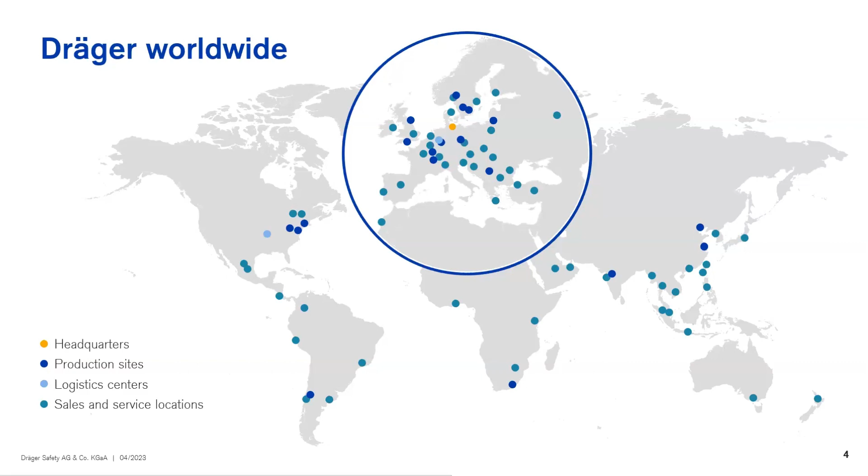Our agenda: we will start with confined spaces, and you will see hazards and risks. Then we have a little slide about accidents and incidents, this one from the NIOSH side. I want to show here that you have also to look for different injuries for rescue and so on. And then we have module 3, our gas measuring, clearance measuring and monitoring. It's also an important point.

So far, then we can start with our first topic, confined spaces, hazards, and risk. We will start with a little bit of basics about confined spaces so that we are all committed on what is a confined space. This is our slide for this.

So a little question, a little bit preparing about confined spaces. What is now a confined space? Have you been sitting in a confined space? Wait a moment, you will see after these pictures a little confined space. But we have to talk about which topics we have of confined space.

You see here, when I lay in some containers or something like this, I enter confined spaces. Also in the middle is a press, as an example. There can also be some gases or hazards inside. On the other picture, he enters with his head in the confined space. On the further side he works, it's not directly in a confined space, but you can see on the edge of this side that his head will enter a confined space. It's the same like on this job, when he lifts higher up with his head, he will also enter a confined space.

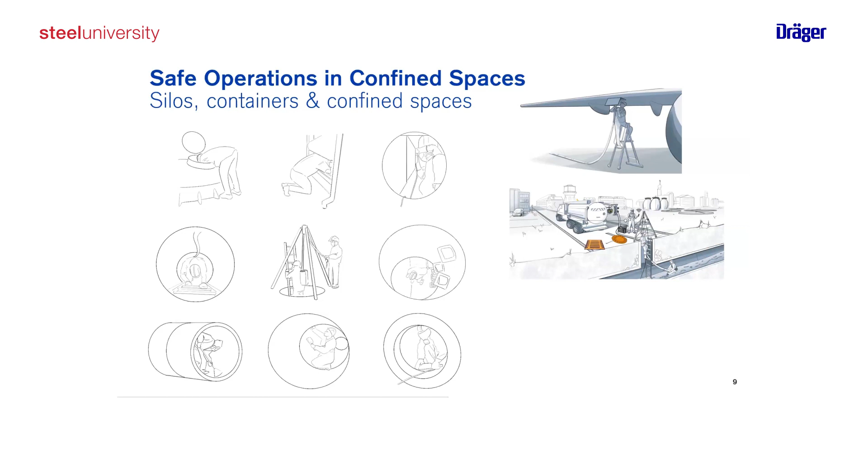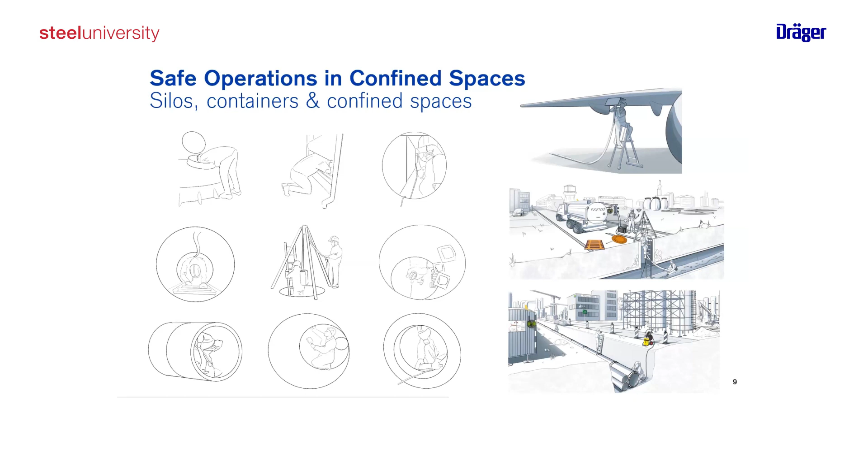Next topic can be this: you know this as an example from waste water, or also from other drains and so on. Here we have a picture, and you see a typical waste water part, but you will have this on your company plans too. So we have here also some waste water, a familiar one. And from the manufacturing side, as an example, when you will be in a tube or something like this, it's also part of confined spaces. As an example, you dig a hole or something like this, and this can also be a confined space when he starts welding or other things. So a little overview, there are some more, but I think these were some typical ones.

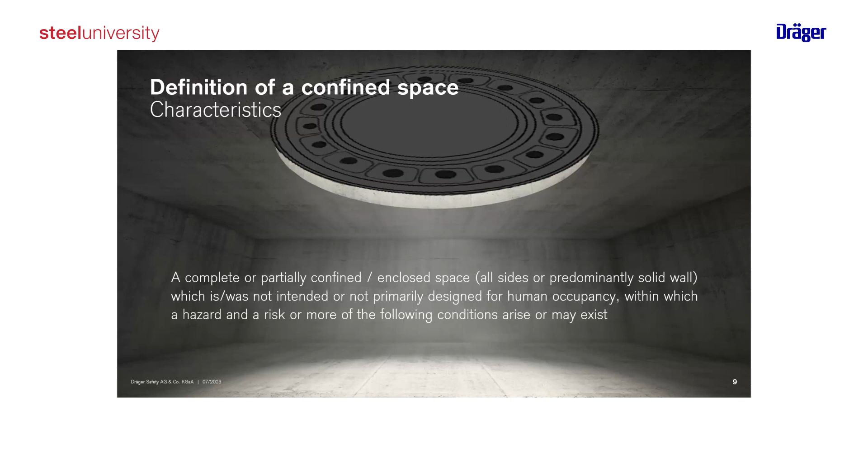And now you will sit in a confined space. So the definition of a confined space: it's a complete or partially confined, enclosed space. It's fully mounted and so on. But the important thing here, when you have the discussion about confined space, the important point is it's not primarily designed for human occupancy. This is one of the important things when you think about whether this is now a confined space or not. So it's not designed for the human being as a normal work environment. This is the main part.

What can be in the confined space? We can have toxic air, for example, or we can have a hole on the top of the confined space where we can enter, and inside of the confined space, as you see on our picture, there can be every type of liquids, hazardous gases, whatever you can imagine, because remember, usually that's a production site and we have some products in it and they could be dangerous also if they are empty or cleaned, but the rest of them will always be there, like you can see on the right side of the screen.

So now we have put some birds on top. We have opened the lid, and what do the birds think at first? This old measurement method from mining, as an example, was with these nice birds, only for information. So this one will say, this is not my part. The other bird says, I will fly away. The other one thinks too long and falls into the confined space. Can we now go further in to get out this little bird?

No, think about it: ERP, or stop, it depends, part of ISO 45001. And think about it, it's a trap. Confined space permitted only by permit as an example, and you have to calculate the risk and do the safety parts. The definition of confined space is the first one: for example, if you have less oxygen, then there's a dangerous atmosphere and you can't breathe. The second one is explosive atmosphere.

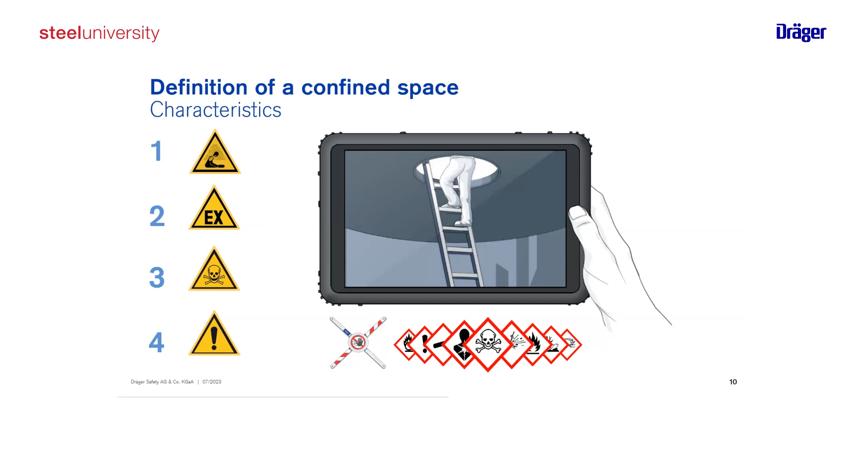But a lot of people forget number four. And number four is attention to other hazards when we work in confined spaces. There are a lot of them. As you can see in our slide, the first one, or one of the most important ones, is injuries caused by falling. Like you heard last year, working at heights and so on, there's always the possibility that you can fall when you want to enter or when you work at different heights. There could be the danger that you are falling.

And you can also have some radiation. It's a bit special, but it can happen that things like this will be present. So you can't taste it, you can't smell it. It's the same like carcinogenic ones. You can't taste it or smell it. Or crushed by...

...a loud noise. That's one of the most important things in my point of view, because think about it. You are surrounded by steel and every noise is so much louder than it would be in a surrounding area where no steel is around you. So that's much, much louder than you can imagine. And for this we have also designed some nice safety tech, which you can find from Draeger, and also electricity shock. Think about a transformer or something like this.

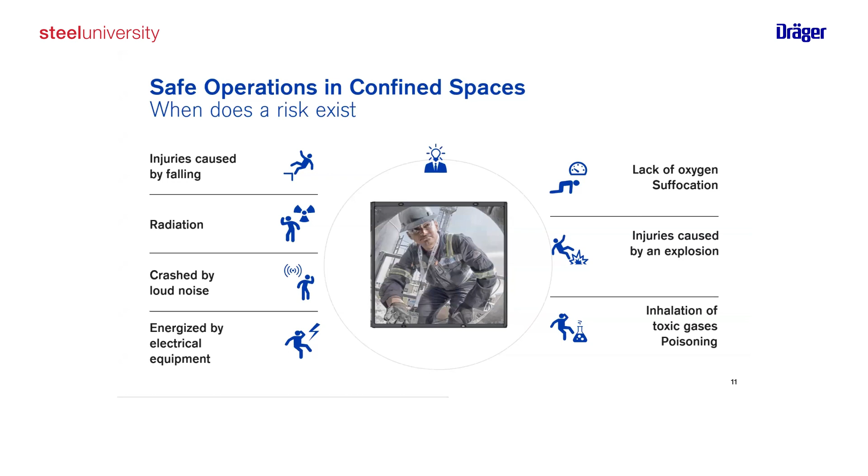And our typical one, what René said, is lack of oxygen. That's quite dangerous because a lot of substances are heavier than air and they push the oxygen away, and then you just have a toxic material there, which you can't breathe. Here we have the reminder also, ox, ex, tox. And the toxic gases, be careful, but we have more information about this later.

So, safe operation in confined spaces - we have talked about risk assessment from last time, and we have also some more topics. This is what I mean with the attention triangle, and we will go through all of this. This is, as an example, mechanical hazards.

The second one, for example, is electrical hazards, which come from different machines you use to work in the confined space. And the next one is our hazmat substances, what we have to consider. Sometimes when we work inside, we bring hazmats inside the confined space, and this also changes the atmosphere.

Another topic is biological hazards. That's also very dangerous and can come, for example, from the production process before we cleaned the vessel or confined space. Think about a bird - it can happen that a bird falls in before you have to enter a confined space. Sometimes you have dead animals or something like this inside, or in other countries this can be snakes, and this can be really dangerous.

Another point is fire and explosion. A lot of the work involves welding or other fire-related activities. So there's also the danger that you can have an explosive atmosphere. And if you bring fire into that, or electrical dangers, there could be an explosion or a bigger fire. So think about that, please.

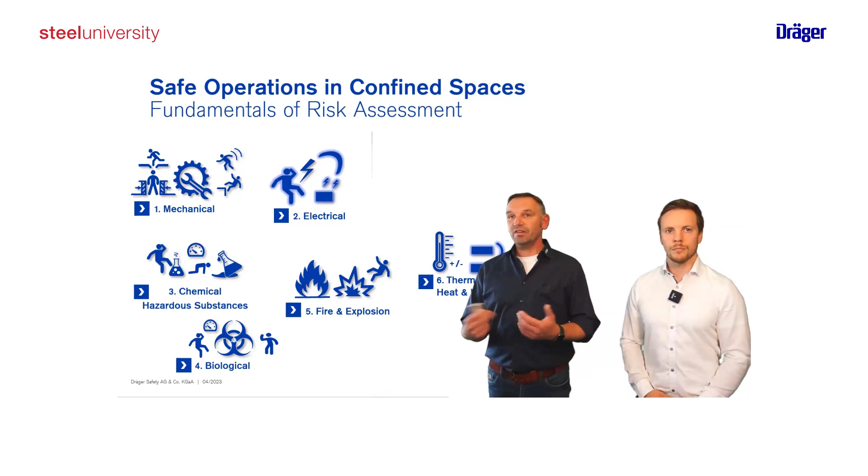And then we have temperature. A lot of people forget to look at the temperature side of a confined space. For example, when Thomas and René enter a confined space, we'll also heat up the confined space with our body temperature. So for example, we start at 20 degrees, and during our work over time, we can also raise the temperature of the confined space. Or you cannot enter because the temperature is too high, and you will be at risk from temperatures, so you have to reduce the working time.

Think about it, we have also for this a nice safety tech from Draeger. And heat and workload, it's also very important. Now we have the summertime, it's becoming hot everywhere, and it's the same thing in confined spaces.

Also the physical effects, noise, vibration - there are a lot of them, and all of them could be dangerous for you. As René said, an important example is when a hammer or a tool is falling - you will see this later in incidents and accidents, falling equipment as example. This is much louder when it's falling in a metal surrounded confined space.

Moving on from the slides, we need a little more space for the next one: number 8, the working environment conditions. Like I said, heat in summer or rain could also be very dangerous, because if you have to go on a ladder down into a vessel, it could be very slippery and you're falling.

This was also a nice experience for me, as I gave a train-the-trainer course in Beijing. We had to stop the training during the daytime and shift it to night, because the training gallery was also too hot - a nice experience also for my trainers in this case.

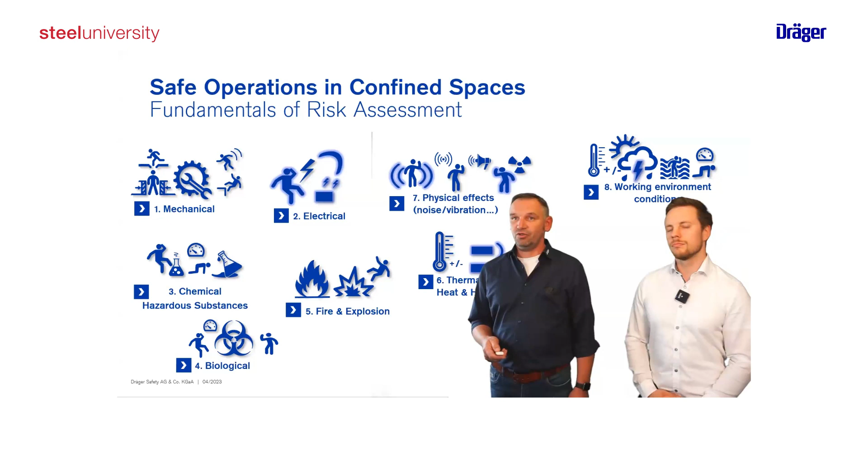Then we have number 9, ergonomics and mental workload. This is also part of the trainings. Mental workload means, in this case, can I go into a confined space? If I'm claustrophobic, this is dangerous also for the other colleagues. And ergonomics in confined space is a really interesting part.

You have to work in uncomfortable situations, not the standard you have at a working bench, so you have to be on your knees for longer times, and this can be horrible in this case.

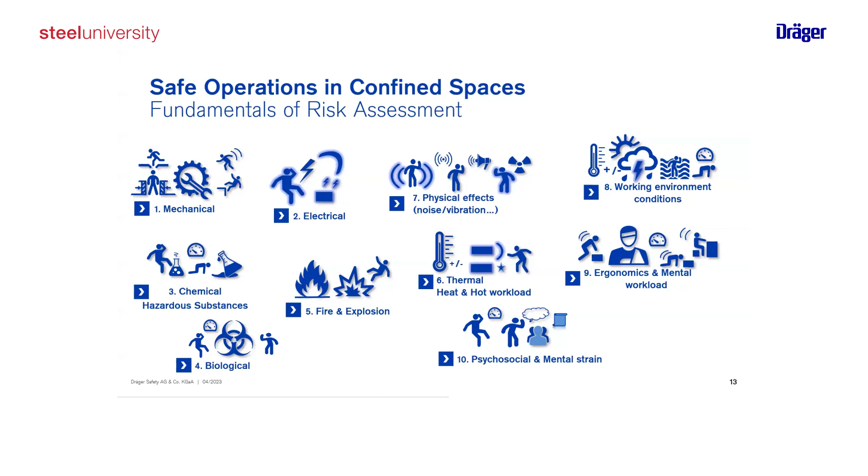Another point is the psychosocial and mental strain. All these hazards you can see on these slides come at you at the same time maybe, and that's a lot of stress you are focused on, and that could be a very big danger - because maybe you forgot to wear your PPE, your protective clothes, or your harness, and then maybe you fall or get hurt.

So we stop here from the 10 hazards - there is more, also work processes and so on. The reason we show this for confined space is the interactive nature René mentioned - this makes confined space so typical. This is why there's a special, in-depth risk assessment specifically for confined space, and every confined space has its own risk assessment.

It's really critical when you just copy and paste a risk assessment. You see we've also included some animals and so on - it depends on which country. Snakes can also be really, really dangerous.

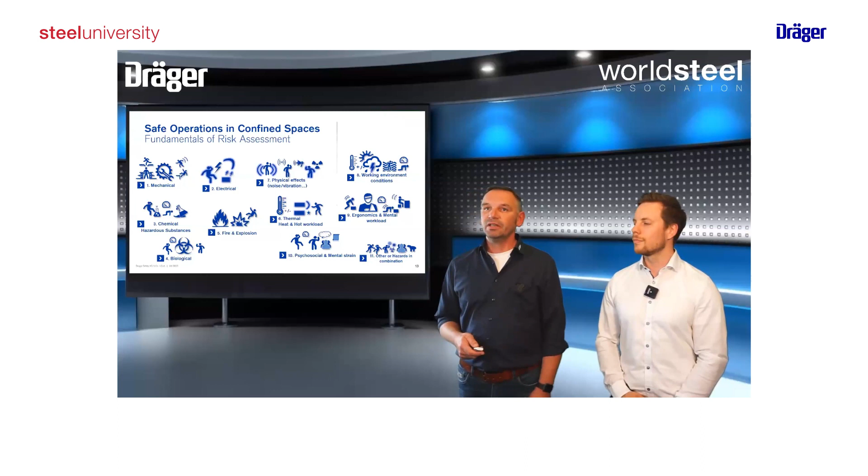As a reminder, we have our ERIC PD here. This is the standard one, but as I said, we make a deeper and more specific risk assessment for confined space. So we have to look every time to eliminate - when it cannot happen, we have our confined space.

Then we have replacement and reduction of the hazards, the substitution. And a really important thing for confined space is the isolation.

You have to take care of the people who are working inside, and take out the hazards of the confined space, so that the people are isolated and can work safely.

Another very important point is controls, the administrative measures, for example. Make sure there is no hazardous atmosphere in your confined space - do your clearance measurement first, and also continuous measurement after that. This is why we talk about it a bit more now.

For confined spaces, isolation and controls are really important. Think about ventilation every time - this is what some people forget. You'll see this later also in the incidents and accidents.

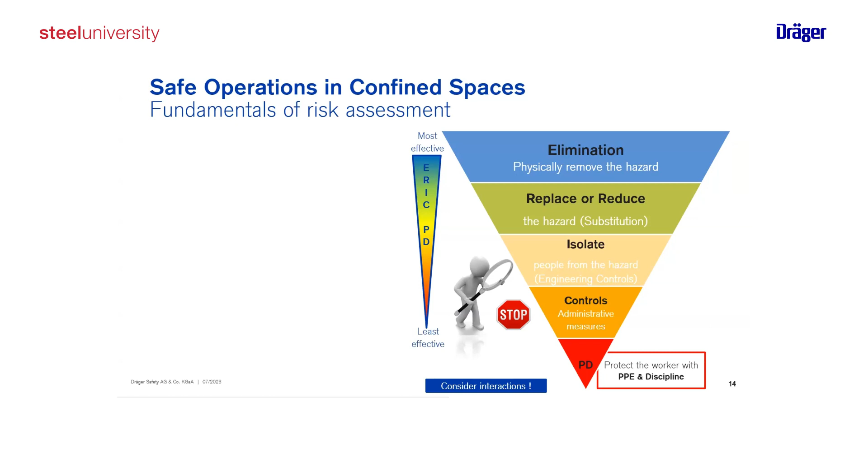And PPE - this is also an important part. PPE is individual for every confined space. Some guys think about fall arrest systems and say, hey, I've used this for this confined space - copy paste can be a big hazard in another confined space.

Think about the hazardous substances, the chemicals - you can have benzene in one confined space or toluene in another. They are different and you have to take care of different protective measures. This is important for us as health and safety engineers, to understand the procedure - for example, you can have 1, 2, 3, 4 vessels.

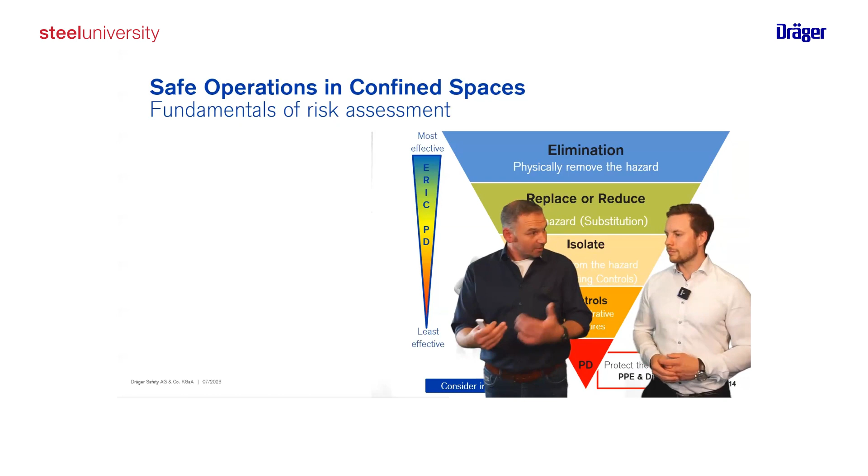There is a video also on YouTube where he's working on the first vessel, and then they have done copy and paste. And on the last vessel it was in an explosive atmosphere, leading to a critical situation.

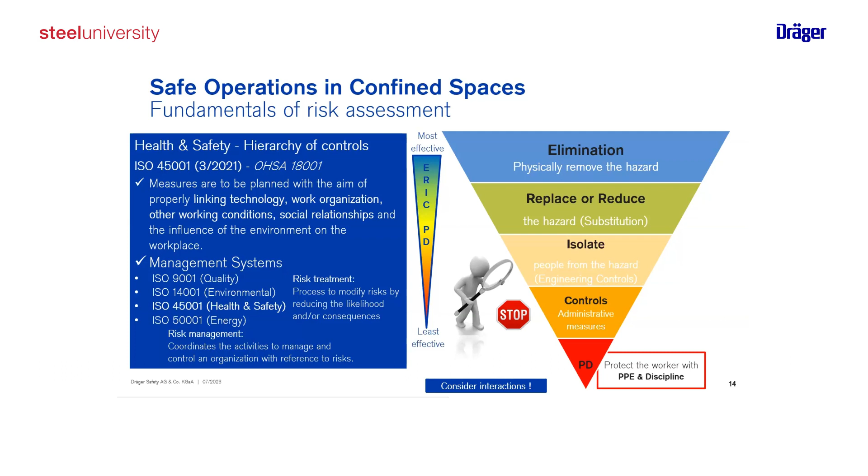I want to focus on one point: on the bottom right side, discipline. That's very, very important for us because you can prepare for every situation most safely, but if you are not disciplined and don't look after yourself and your neighbor and working partner, nothing can help you. So having the right discipline is very important, and this is what we also train by RSS, Rental and Safety Services, where we train extra people for this.

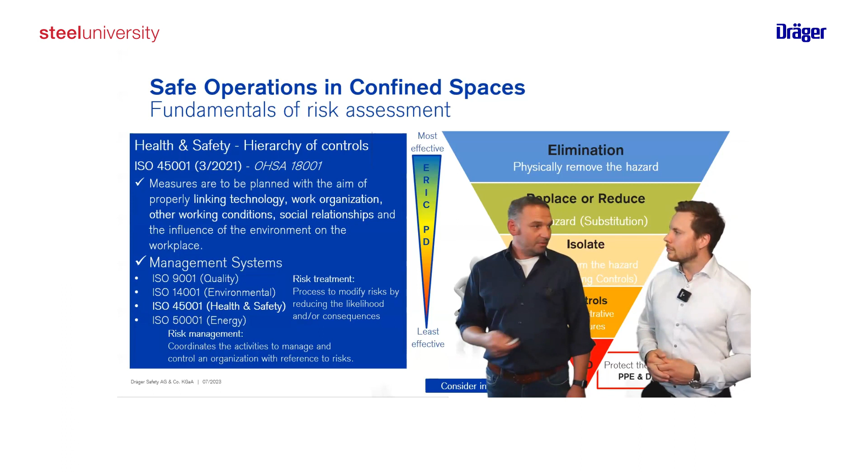This also gives some 60 seconds of safety - we have designed some things about this. So then we have our safe operation: planning, permit, and clearance measurement.

For this we have different jobs, and you have to follow the job. The permit is written for inspection, not maintenance, and some people have to learn to follow what is on the permit. This shows how important the permit is and that it will be used - you will see this later as part of our incidents and accidents. When you write a permit and don't use it, it makes the permit no sense at all.

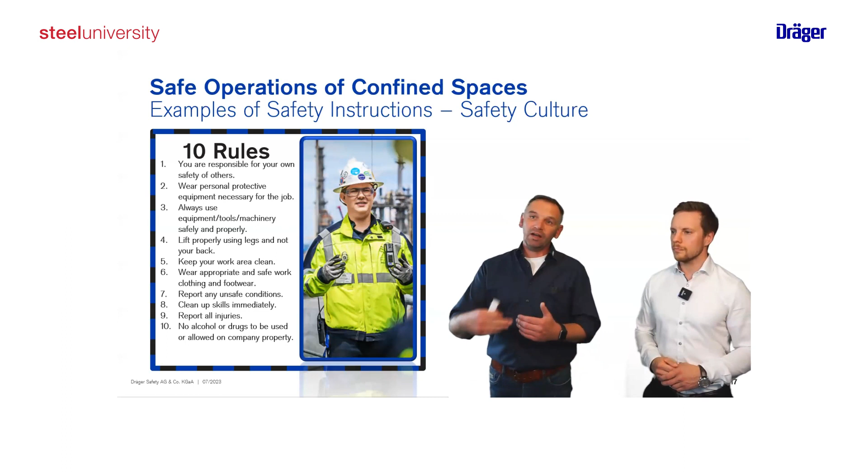This is also part of Vision Zero. With this part you can see which contractor you have, and you can see how the workers work together. In this case, you can see how far along they are with this safety culture. We'll have a little bit more later.

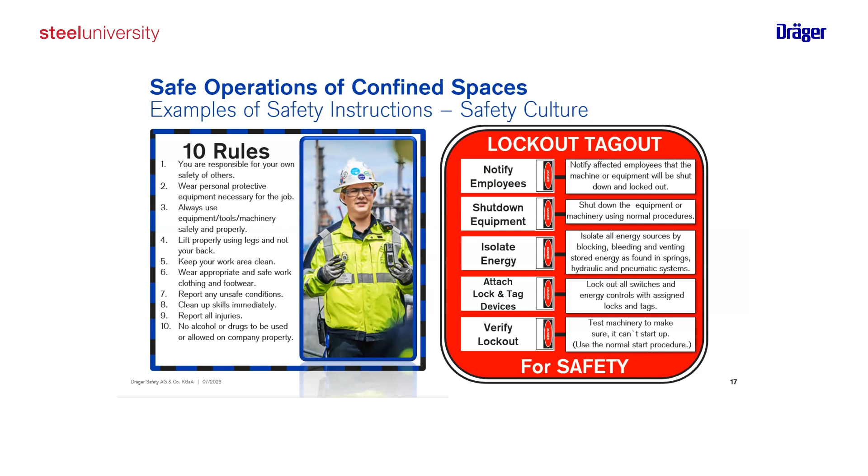We have a little bit on lockout, tag out, so we'll see this again at the end of the presentation. But remember here, it's part of safety - you've spoken about isolation and control. So with this first part, we'll be quite close to the end of this section.

Now we have the harder part: facts. We have to talk about accidents and incidents, statistics, and also what makes sense - I'll show you on the last slide. A miss report makes sense. When we look at incidents in confined spaces, it's quite hard to find exactly where the accident or incident is, and this is the reason I prepared this from NIOSH.

There I find it useful to think differently about what was happening in the confined space. We had to talk about the hazmats - for example, number 3 was hazmats or dangerous parts. Sometimes the mistake is that deaths or fatalities are only counted under hazmats or explosive atmosphere, but people forget to put this under the confined space umbrella.

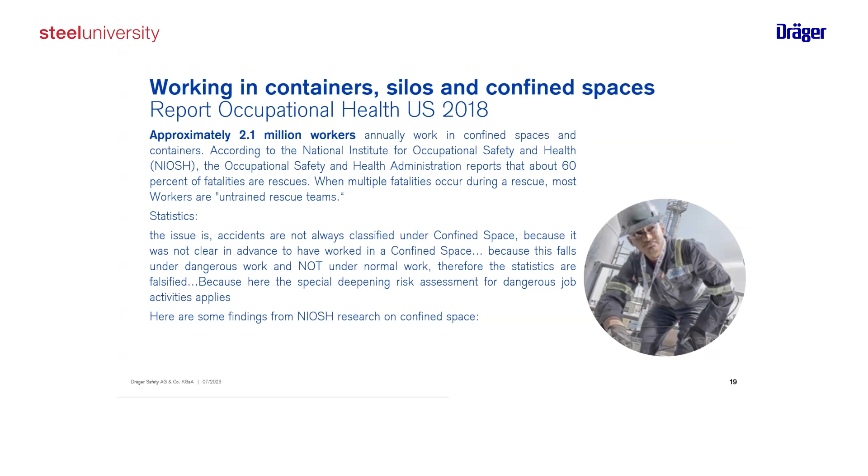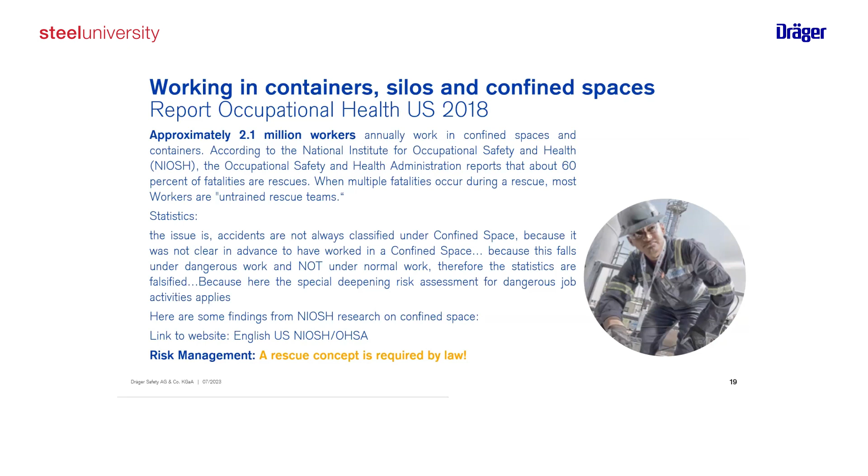Here's some more findings about NIOSH and research of confined spaces. When you want to look this up, here is the internet link. NIOSH also said to make a risk assessment, more about rescue concept, and it's required by law. Here's the link when you want to look at these by NIOSH. And here's a little overview.

For me this was a little surprising at first. I was looking at supervisor and thinking they mean the safety officer or the safety observer, the most trained person on site maybe. This was present every time, 85 from 100. So this is a good count, but a little scary was here, 29 died supervisors. So this is a little bit strange.

So then we have written CSE procedures. You see from 100, only 30%. And this is less. Then you see the last one, used the procedure: nobody. And this is what we said at the beginning.

The other one had training for confined space. You see only 15. And you see it's required, you have to be trained. And you see rescue plan, zero. Or they said we're focused on other things.

Next one is, as example, what is the reason we go into confined spaces? This is maintenance, in this case routine work. So when we go into confined space, in most parts this is maintenance, or it can happen for repair. And you see inspection, only 15%. Normally we start with inspection first, what is it, and then we can start with a repair. So you see it's only 15%.

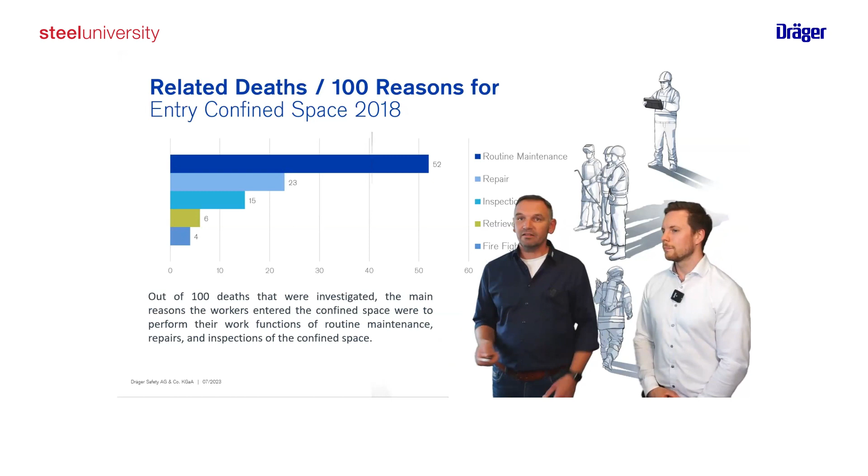And when we see behind me in the green one, these are the objects and different ones, and there we have only 6 in this case. And you see for firefighting it's quite less, this is really quite less. So the main part is maintenance.

Also here in this case, fatal in this case, you see atmospheric on 300 is unbelievable. A really dangerous thing in confined space, as we talked about, is the noise or the vibration loose materials, or some equipment falling in. In this case it can happen some guys are working quite close to a confined space and something is falling in. Then I said, now a permit or something like this. I said, all fine, they go further on to get out the equipment. And this means these really fatal parts.

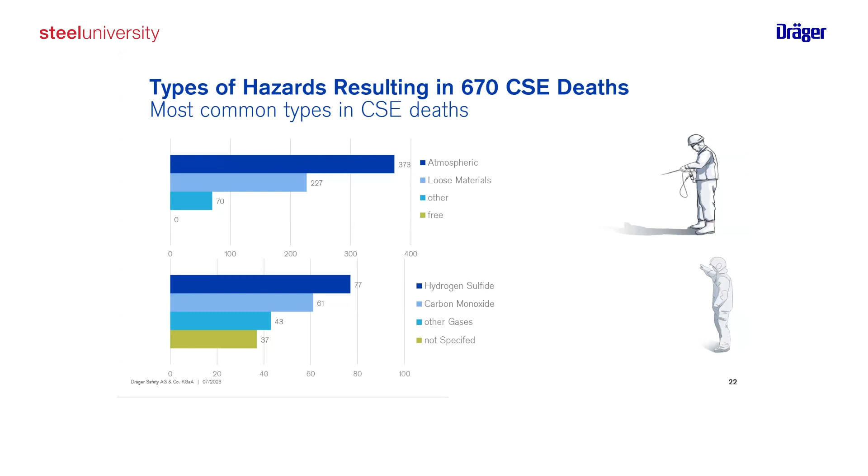And then also others, last one is 3. So then you see we have also toxic ones. You see H2S in the overview chart there, you can see hydrogen sulfide, H2S. It's with 77% the most dangerous toxic gas which we have on our construction sites, and it's nearly followed very close by carbon monoxide.

Carbon monoxide for you in the steel industry is so important, please remember that's a toxic material. And when you want to know more, you can go back to module 2. There you will see our other colleague, he explained more about this topic.

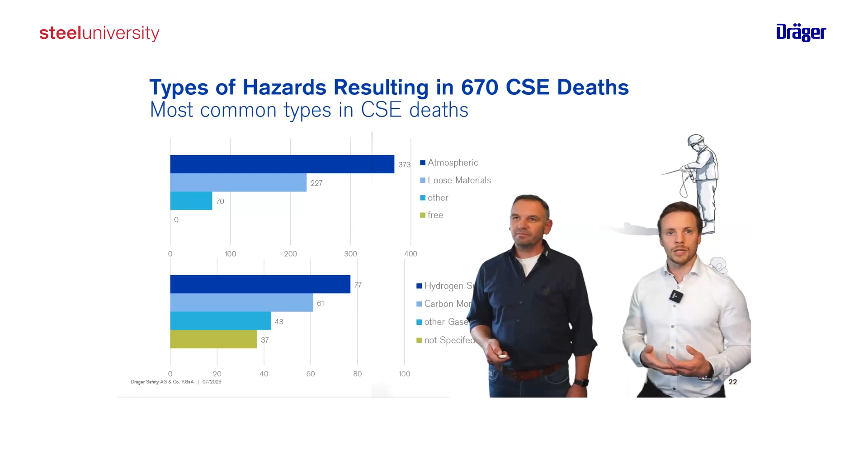And other gases, not specified gases, there are always mixtures of gases. So nobody can tell afterwards, when an accident happened with toxic materials and you have a mixture, what specific kind of this mixture was responsible for this accident, or for this fatality in the worst case. So that's also an important point, which comes back to the permit and the discipline. When there's some breathing protection, please make sure that everything works fine and you wear it and use it.

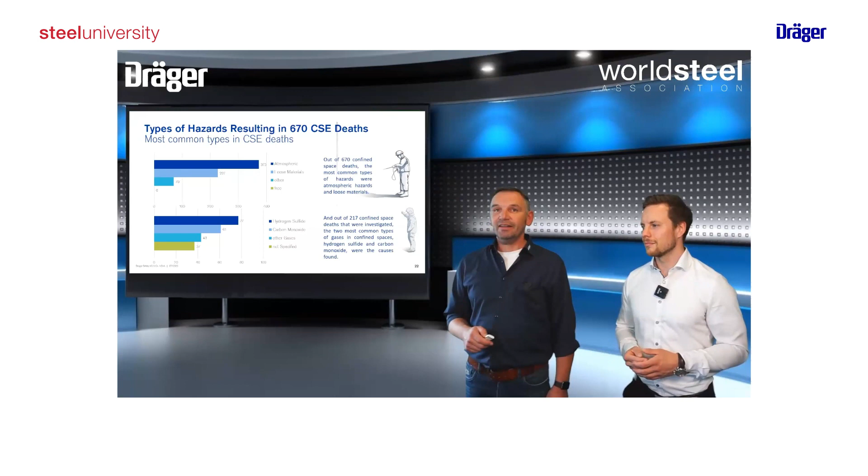And all will be tested and ready for use. Yeah, exactly. And we have prepared this after these slides. We have some gases more, so we have a little bit more information about this. So a little bit of text that you can look at on your side.

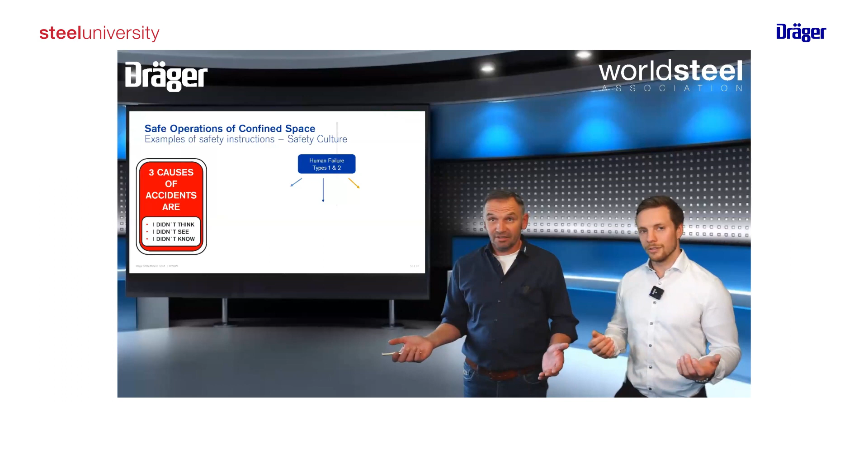And here we have also some things about safety, also for accidents and incidents. Three causes will be, as example: I didn't think, I didn't see, and I didn't know. So what is this about the training? These were the three monkeys in this case, but sure, we have to look for it.

And then we have the two types of human failure as example. You see on one side is the error, so action error. Then we have action not as planned, and this is a really dangerous thing in confined space. So when you see it is not working as planned, stop. That's very important. If something comes, maybe you hear something that shouldn't be there, like a gas flow or whatever, stop your work, go outside of the confined space, ask your supervisor. Information is so important, please remember that.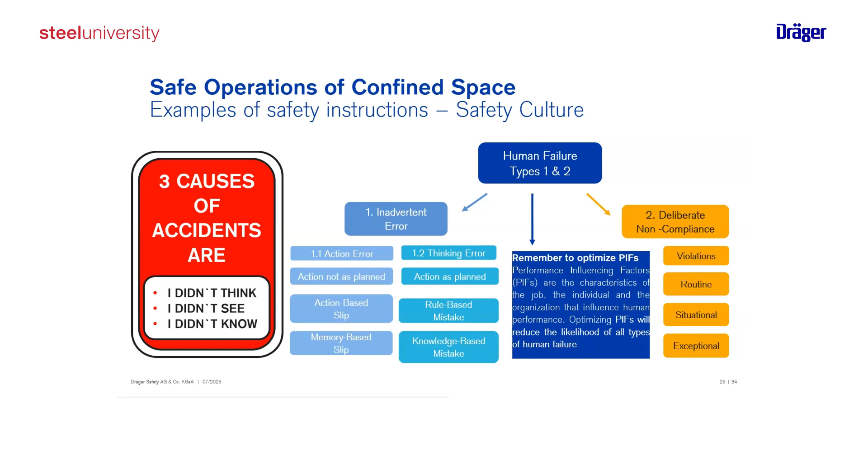Then we have also the action-based slip, and we have the knowledge-based one. Thinking error is an example. And on the orange one, you can also see, this is what René also said, work discipline. And think about routine. You have seen this in the accidents and incidents, like 'we have done this for 30 years the same way.' This is the typical one on the orange category. Remember to optimize these, and this is training discipline for the workers.

Also think about noting a near miss report. As an example, we had an emergency escape, what you explained with the gases, so they exit out of the confined space. You have to note this as an incident or accident to make, in this case, a near miss report to look at what we can do better next time. What was the reason for this? A lot of people don't notice this, and that's the reason we get incorrect values of the accidents and incidents, to go deeper into the details here.

So now I hand over because we have now our gas measuring. I hand over to you, thank you. Change the slides, of course.

And thank you, Thomas. I just want to make sure to go back to the last slide with the near misses. Think about your daily work on a turnaround, or not a turnaround, just daily business. This is one of the most important things that we train every customer on. Near misses have to be documented and you have to learn about it. That's so important so the same mistake doesn't happen twice or a third time.

Now I'd like to give you some more information about gas measuring, clearance measuring, and also one very important point: monitoring. So please remember, suffocation, the absence of oxygen, is so dangerous. Please make sure that you have enough oxygen in your confined spaces or on your working place.

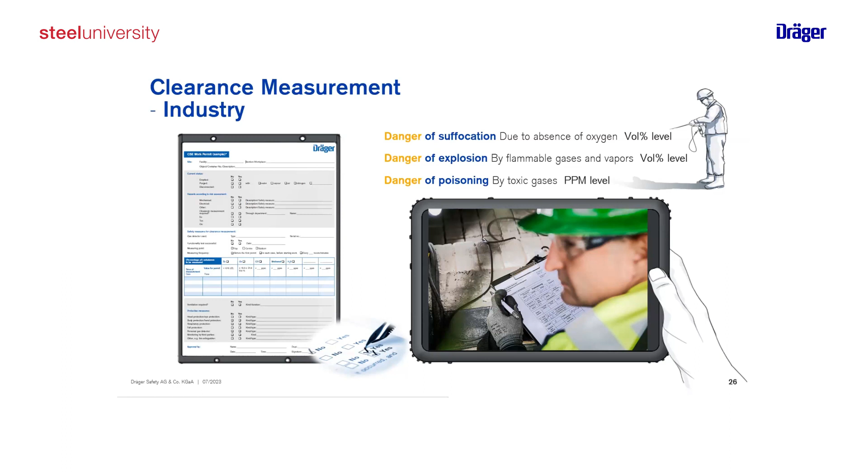Another danger is caused by explosions, so by flammable gases or vapors. They are measured at the volume percent level, but they are also very important not only inside of the vessel but also outside of it. Maybe you have a tube or production line which is in process and gets a leakage. Then you maybe get an explosive atmosphere when the flammable material comes together with the oxygen in the air, and you get an explosive mixture, which could also be very dangerous for the people inside of the vessel. So it's very important on both sides.

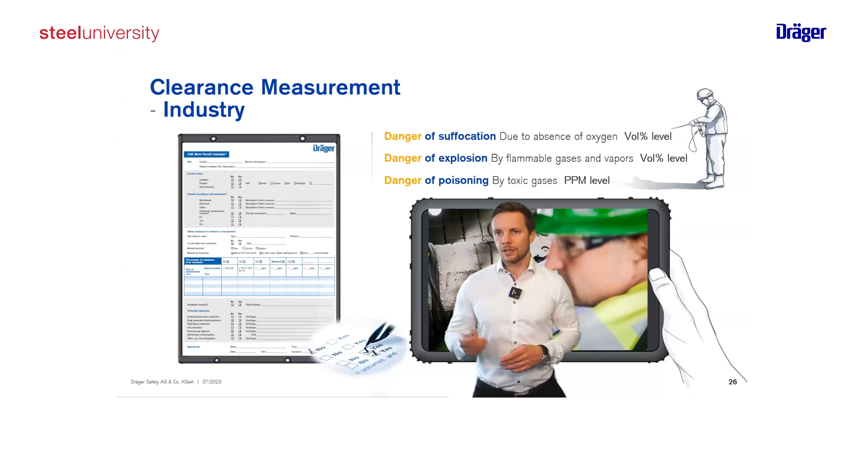And as we talked about, poisoning by toxic gases, they are measured at the ppm level. They are also very, very important, and this is just a few examples. Like I told you, H2S is the toxic gas which is responsible for most of the fatalities we have on construction sites, followed by carbon monoxide. That is very important for the steel industry, for your industry, and we want to focus you on this one as well.

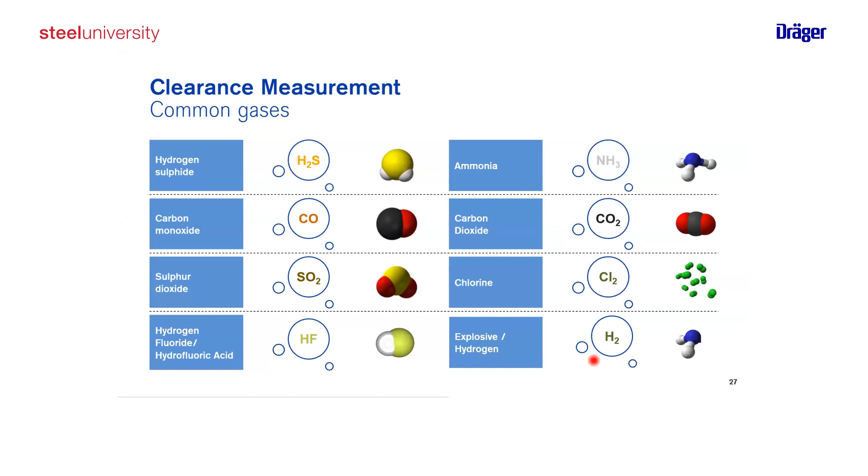But I also want to give you information about ammonia, for example. It becomes more and more important, also in the steel industry, when you're thinking about hydrogen and the clean tech industry, you need, for example, ammonia or methanol or whatever as a carrier gas. This is very, very important and will be even more important in the future. And I talked about the clean tech industry, the hydrogen - this is also one explosive material I want to focus you on.

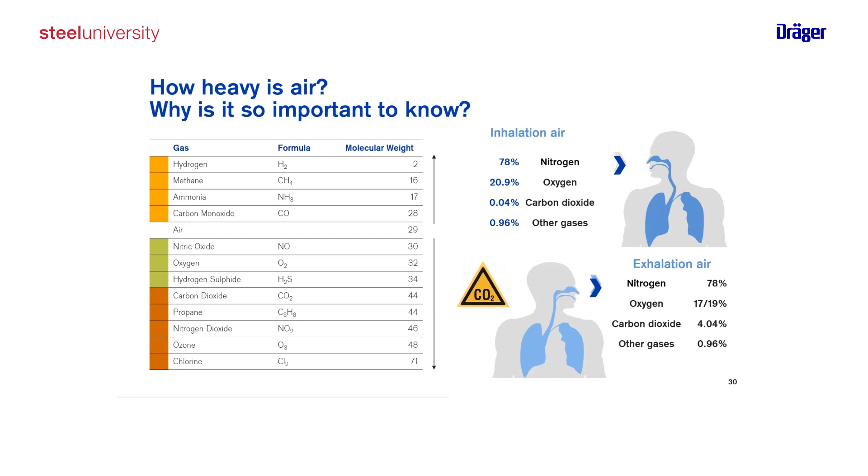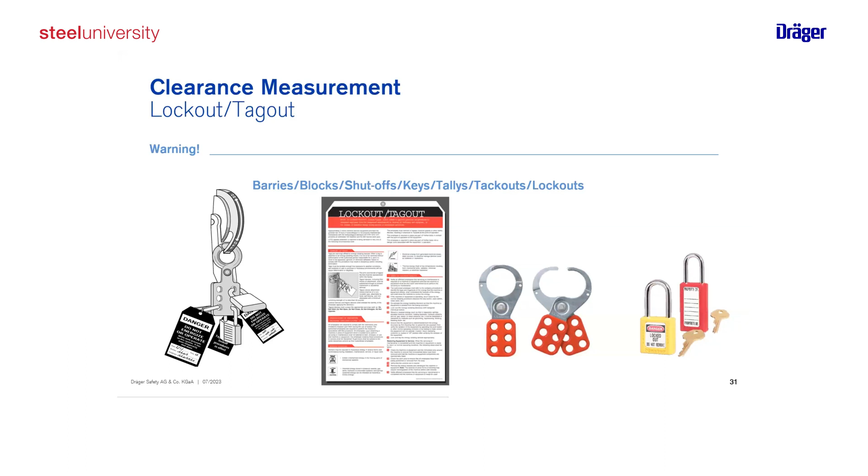Okay, barriers, lockout tagout systems. They are very important, and they are one of the bases for the permission. So every worker has to make sure before he starts with the work that the lockout tagout system is in the right place, and it's set so that it's not possible for hazardous substances which come from other tubes or whatever to go inside your confined space where you want to work.

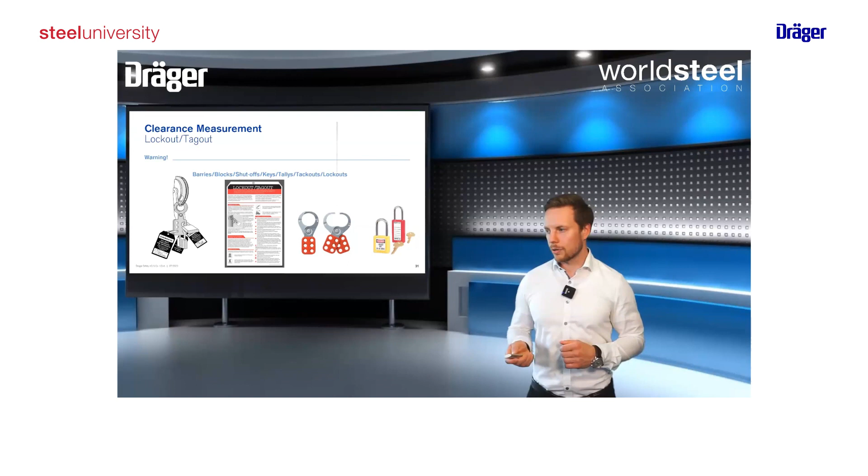Great care should be taken that all isolation systems are kept in place until all persons have exited the confined spaces. So you have to make sure everybody is out when you want to replace them at the end of the work.

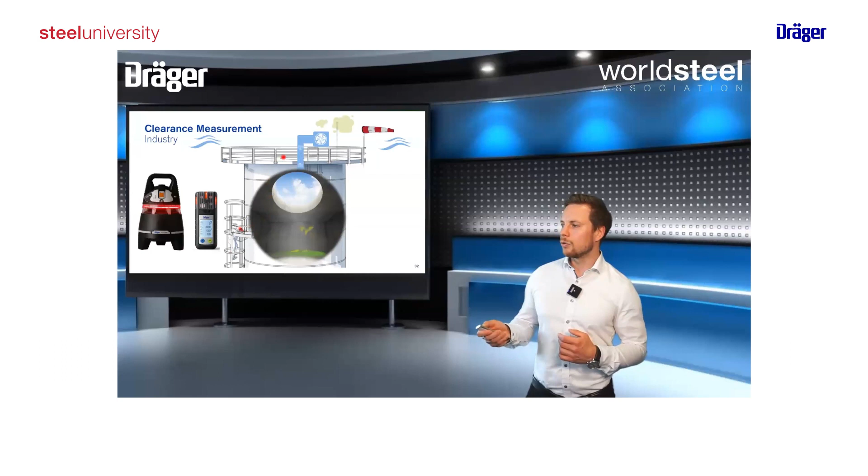Here you can see the worker, which climbs up the ladder to work inside this vessel. And very important, you have the ventilation here. We talked a few slides before that the ventilation is very important, and it's also important for the measurements. So the ventilation has to stop 30 minutes before you do your clearance measurement, so that you have the right point of view inside your atmosphere there.

So these are the key points I want to focus you on. You have to make sure that you have a proper gas measurement, that this one is tested for this day. You have to make sure that you have the knowledge about the target substances. So what toxic materials could be inside my confined spaces? Are they lighter or heavier than air? Where do I have to measure? And organizational settings, right place, right time, that's given by you on the permission.

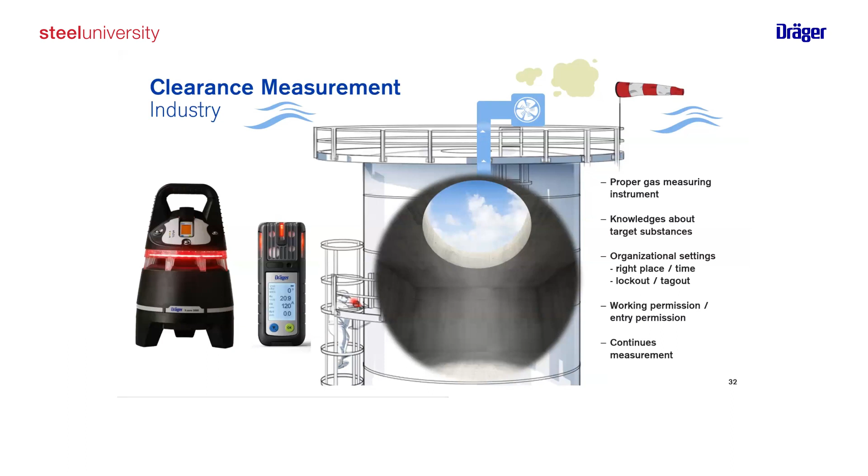The lockout tagout system, it's very important. And here, the working permission. And this is one point I want to focus especially on, the continuous measurement. So if you have done your clearance measurement, you also have to do a continuous measurement after that to make sure that we don't have changes or new hazardous materials inside of the confined spaces.

Here you can see a measurement on the confined space on different places. You have to do the measurement for every manhole. That's very important, and for that you have to use the right material.

For example, thank you Thomas, we have the tube here which we can use on the bottom line, for example. You can see it here on the worker, he used the right one. But if we have to do a measurement from the top of the vessel, we need something different. So we have these measurement balls that you can let down into your vessel or confined space and do the measurement inside. With these we can handle much more tube length than with this one, which is maybe 1 or 1.5 meters. With that one we can go down up to 10, 20 meters. So it's very important, please make sure that you use the right equipment.

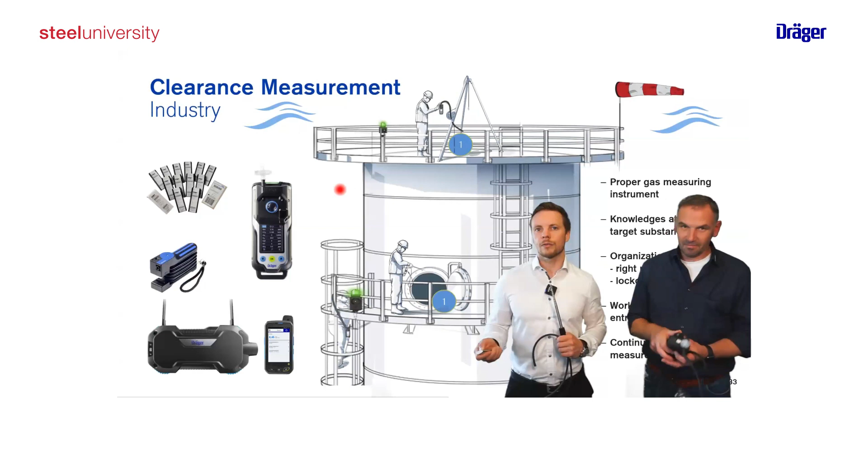Here on the left side of the screen you can see different gas measurement devices. The right device depends on what target substances you have. Maybe to test the oxygen it's enough to have an XAM 8000, like you can see here.

Thank you Thomas. But if you want to do a measurement for organic substances, maybe the X-pid is the right measurement device, because there you can have a gas chromatography inside to do selective measurements for your toxic materials. After that you know exactly what target substances you have and in which concentration.

And we can also use the hoses and so on, also with the ball and so on. You can connect the same hose which you use for the XAM series on the X-pid, for example. That's a reason we have a nice training for this called AGT, Authorized Gas Tester. It's in the portfolio from Draeger.

So we continue our measurement portfolio. There you can see an external pump which you can use for your XAM device. That's also possible to wear as a personal protective gas measurement device, so you can wear it all day and also do a gas measurement, a clearance measurement with an external pump. Here we can see a fixed gas detection,

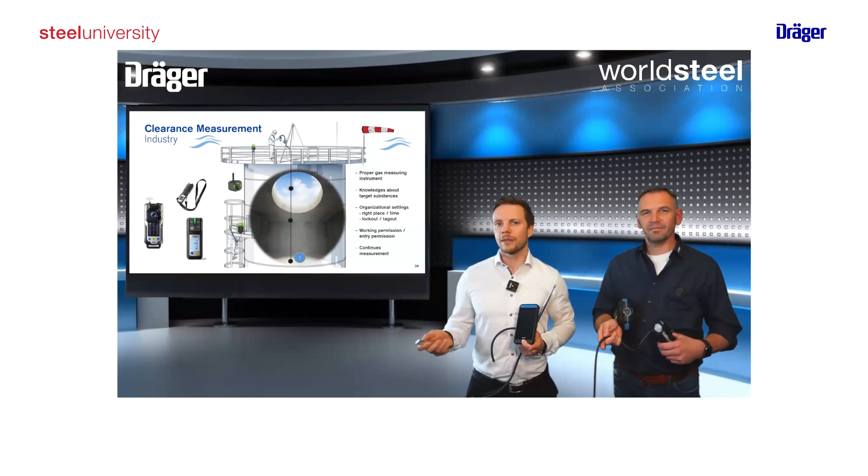Do a measurement on the bottom of the confined space. Therefore you need the ball with a full length, for example, and then do a second measurement a few meters higher, because you have to make sure we have a clean area here and also a clean area here. Because we have to work on the bottom, and we also stand up and have to work on this height and also on the entry. That's also important, that there are no hazardous substances on the entry.

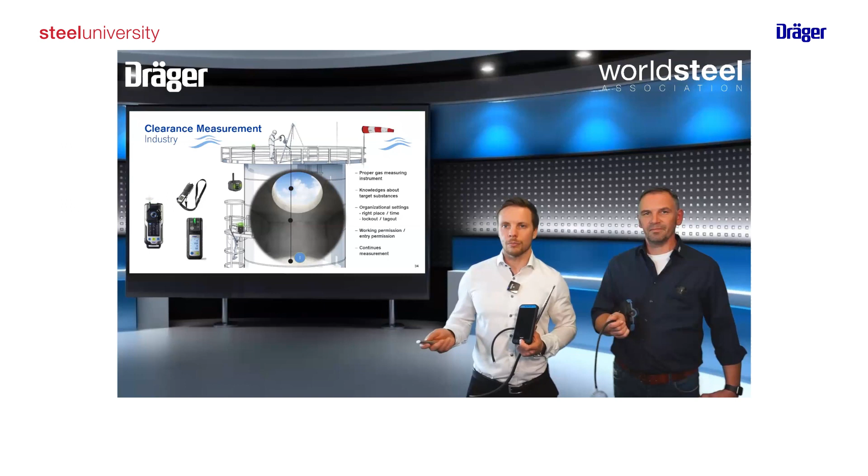So three measurement steps. Use the correct measurement hoses and think about that we have a pump integrated in our measurement devices, or on the external pump, but it needs some more time to pump the atmosphere from the first step into your device. So this measurement will take much more time than the third measurement.

And you see, we look also on this picture, wind direction. The wind direction can change, and this is how important it is to have a technical ventilation. Natural ventilation is one of the dangerous things.

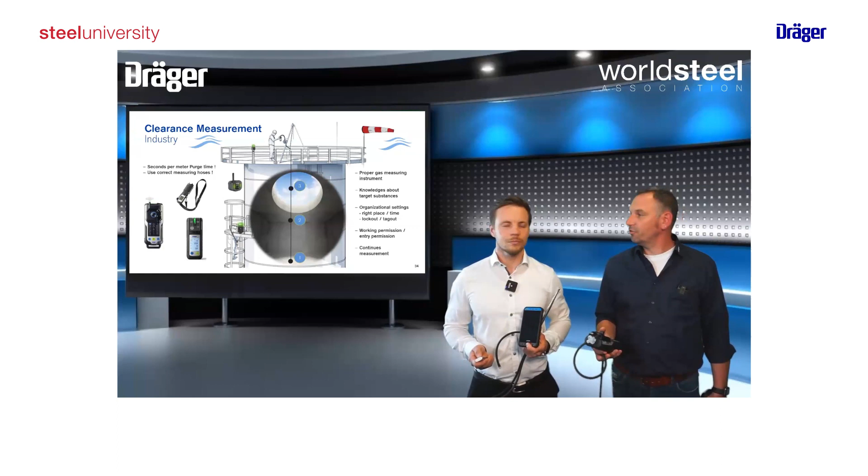Okay, on this one you can see our X-zone. It's made for area monitoring. So you can measure the hazardous situation outside of the vessel and get some information inside of the vessel. You have the possibility to connect them to each other and also put them in different kinds of groups if you want to. You can see that on the picture on the right side.

These X-zones are connected with each other. One of them is outside of the vessel, the second one is inside, we have a third one inside, a fourth one outside, and a fifth one on the next level. All of them are connected. So if we have a hazardous situation on the top of the vessel, we also have the alarm on the bottom because they are connected.

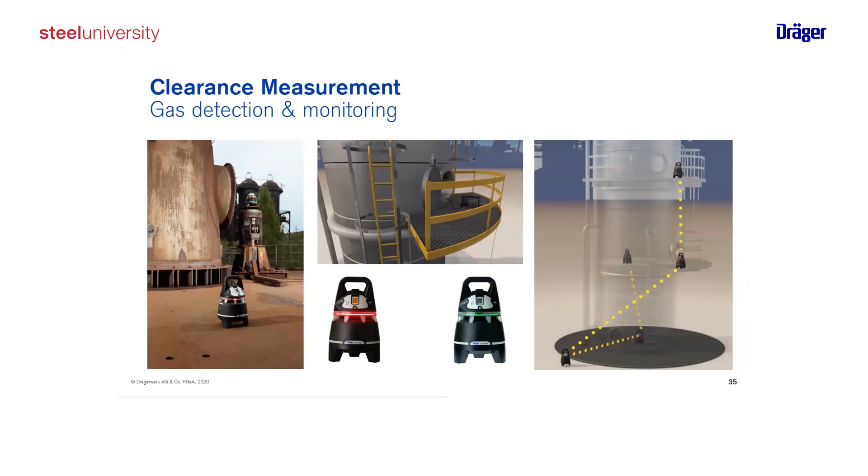The important thing about this is when we have a break, you have a continuous measurement. Otherwise we have to retest the atmosphere again. With this, it's a possibility to avoid that.

Now we have to focus a bit on the time, and this is just one point I want to show you. The lockout-tagout for, it's not really a lockout-tagout, but it's a block to block the confined space, the manhole, maybe for a break time, for your lunch time or whatever. Please make sure that this one is right in place, that nobody can enter the confined space without a safety guard, without a clearance measurement, or without a continuous measurement.

Here we have one example with the X zone on the outside, which has a tube inside the confined space. And here we have one of the workers, a gas analyst, doing his clearance measurement before the work starts. Then he can write the values, the thresholds, into the working permission, giving the same information to the working permission office so that everybody is informed, and to give the working permission for the right day.

And they can change the information. This is the nice guy behind us with the green helmet, you can't see him at the moment. He can also get the information on his display.

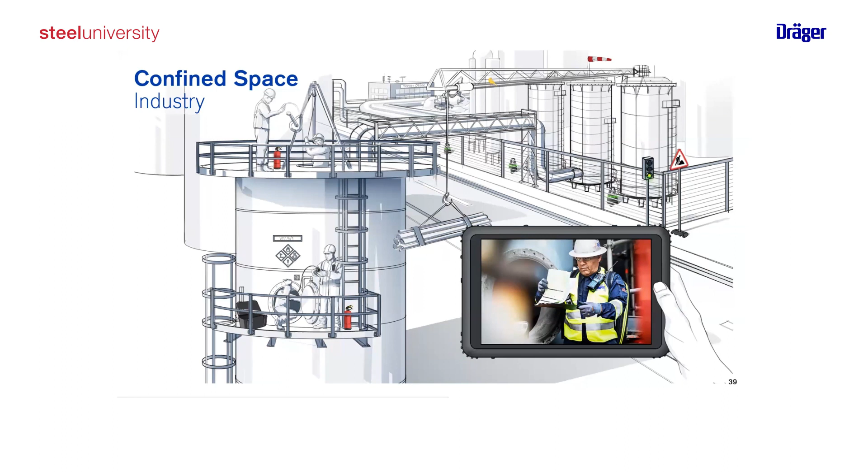Also another picture. And on the last slide, I just want to give you the information that we have the possibility to get a wireless connection. If we want to measure something, we can give that directly to the working permission office so they can do their working permission for each day. So that's a factor of time, you spare some time that you need to go down and go back to the working office. That can be done digitally.

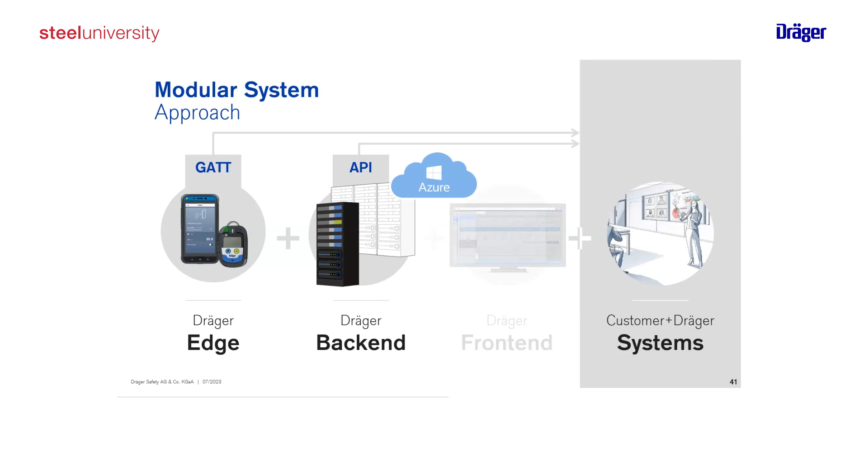And you see, we have exactly one hour. Yeah, we are right on time.